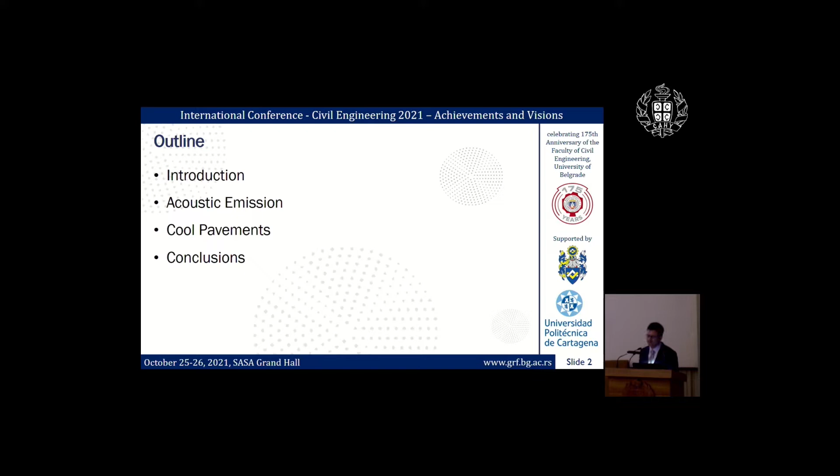But apart from these applications that are very specific, I would like to highlight that the use of applied physics in different fields requires collaboration from the scholars of that field. For example, I'm conducting research in soils now with some colleagues from the Faculty of Civil Engineering in Cartagena, and I need them because I don't know anything about that. So to apply this acoustic emission technique, it's necessary to collaborate, and they don't know anything about acoustic emission and only a little about physics.

So working together it is possible to get much more outstanding results and work on very novel problems that cannot be solved by only some kind of scholars alone.

Well, first of all, I'm going to speak about the acoustic emission technique. I don't know if you are aware of it because it's not very well known. It is a technique that is based on the measurement of the release of strain energy inside a material. But the name can be a little misleading because we are not measuring in the acoustic range. We are in the ultrasound one. So we measure waves between 20 kilohertz and 2 megahertz.

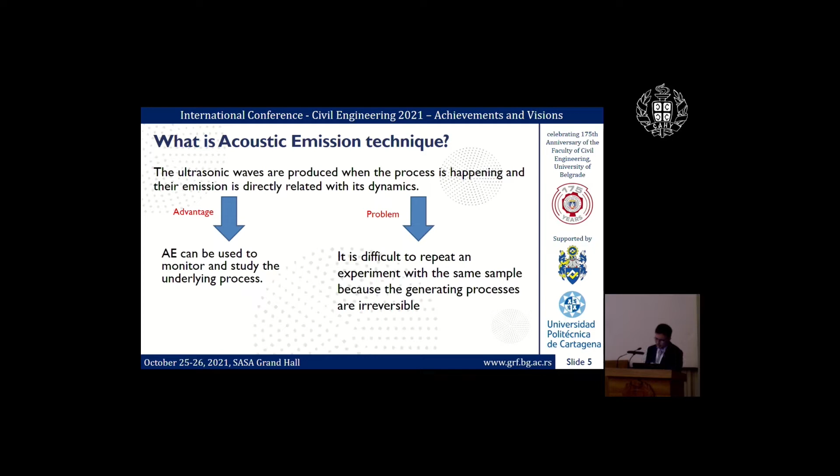Its techniques can be used in many different things, but it has some property that it can monitor a structure during a long period of time. So it can be very useful to use it as a health monitoring method, structural health monitoring, that can control what is happening, how is the health of the structure during a long period of time. So if you have a critical structure like a bridge, then you can get it controlled.

I have said something before that is not very true. That is, the ultrasonic waves that we are measuring here are spontaneous, they appear alone. That's not true. You need an external stimulus over your sample, over your structure, to measure something, because you have to induce the internal process. It can be, for example, to apply a stress or a thermal stress or something like that.

But when you are carrying out structural health monitoring, usually the external stimulus is the ambient condition. The ambient condition degrades your structure, makes it corrode, or produces a crack there, and then you can measure the ultrasonic wave, the acoustic emission that is being produced there.

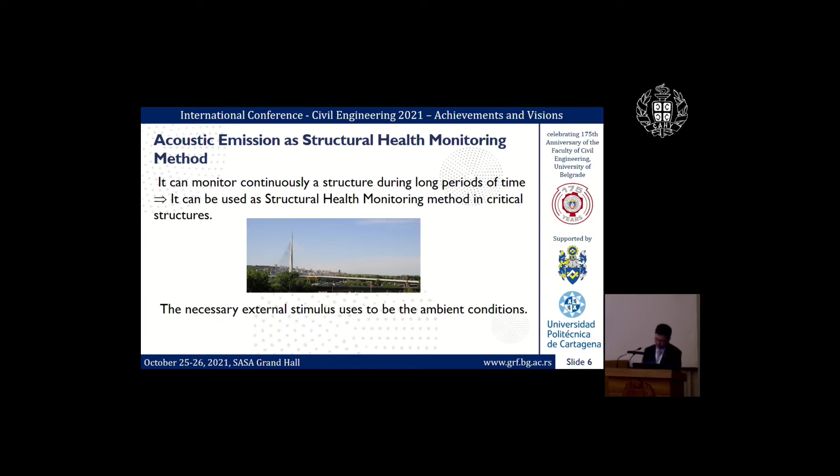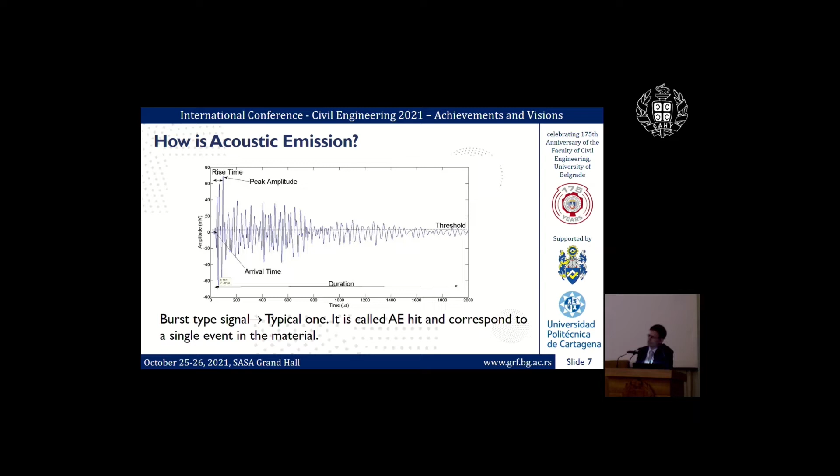Here we can see the typical parameters that we have to consider when working with the acoustic emission technique. That is the arrival time, which can be useful for localization, and it's the time when the wave arrives to the sensor, the duration of it, the rise time, the time to get to the peak amplitude, to the maximum one, and of course the amplitude of the hit, which gives us an idea of how strong this emission has been.

But acoustic emission has a problem. That is, it has a very low amplitude. It is necessary to measure very, very little displacement. So in the end, we need sensors to be very sensitive. So this makes us record many things that we don't want to measure.

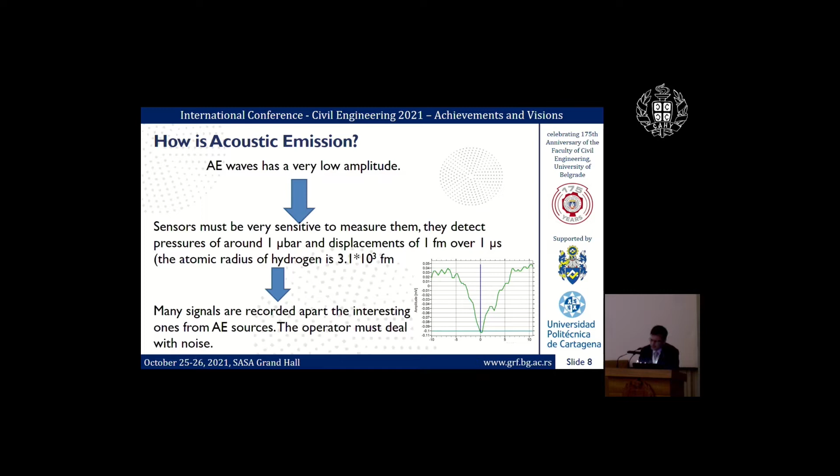Well, now that you have a little idea of this technique, how can you use it in civil engineering? You can use it in two ways. First, the most obvious one is to monitor internal processes. For example, if you are developing new concrete materials, then you can try to monitor or inspect what is happening inside your sample. Or maybe if you are carrying out a soil test, you can try to identify the mechanisms that are happening inside it.

But the most used part of acoustic emission is to monitor the health of the structure. So I'm going to show you some examples of application in health monitoring of structures. The first one will be to study plastic deformation, after that cracking, and a little bit on corrosion, but in reinforced concrete structures.

When we have to deal with plastic deformation, we have to take into account what is called the Kaiser Effect. What is it? Well, it is about the lack of acoustic emission when a load is applied until its previous stress level is exceeded. What does it mean? That if we apply a load up to, I don't know, 10 kilopascals, then you decrease your pressure, your stress, your load, then if you want to have acoustic emission again, you have to raise this level. You have to go to 20 or to 13.

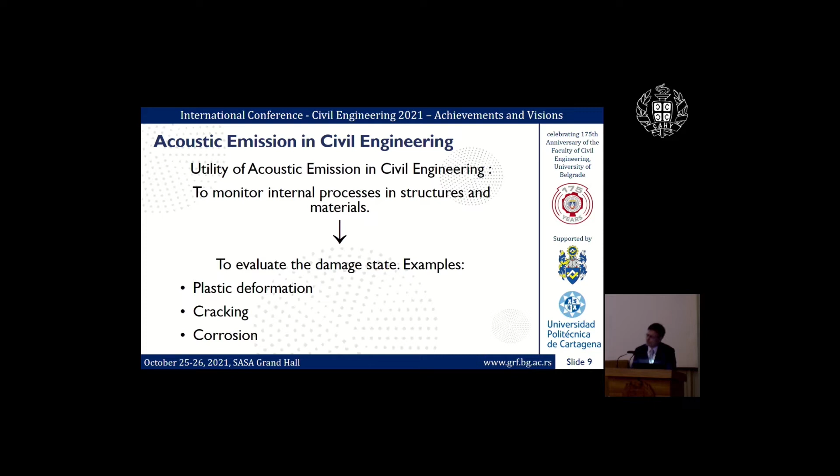Why is this happening? Well, it is because the acoustic emission is supposed to be produced only by the plastic deformation of a material. The elastic one is supposed not to produce anything. So when you apply a load to the material, to the structure, it's going to suffer elastic deformation and plastic deformation, and when you reduce the load, the plastic deformation obviously remains there, it's not going to change. And when you apply the same load again, no more plastic deformation is being carried out. So you are not getting any acoustic emission unless you produce more plastic deformation.

Well, how can it be used to inspect a structure? Well, what you have to do is to inspect your structure regularly between several periods of time. If there is no added damage in that period of time, then we are not going to measure any acoustic emission.

But if you receive acoustic emission, what does it mean? It means that some kind of damage has occurred during that period of time, and there is some discontinuity in the structure, in the mesh and the material, and there the concentration of stress is going to produce an acoustic emission that you are going to measure with your sensor. This is what is called the Kaiser effect corollary, that is, acoustic emission testing reveals damage during the preceding period.

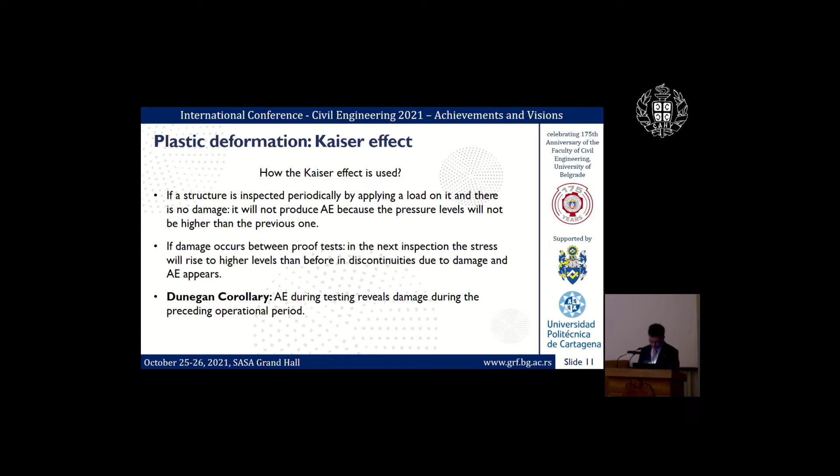Another use of the Kaiser effect is when it is violated, when it is not confirmed: when acoustic emission is emitted with an applied load that is below the previous maximum one. What does it mean? Well, as the Kaiser effect is considered universal, if it is violated, it means that serious damage is present in the structure. If you have a global emission from the whole structure, it means that a lot of damage is there, and you have to be very careful about what is going to happen with it.

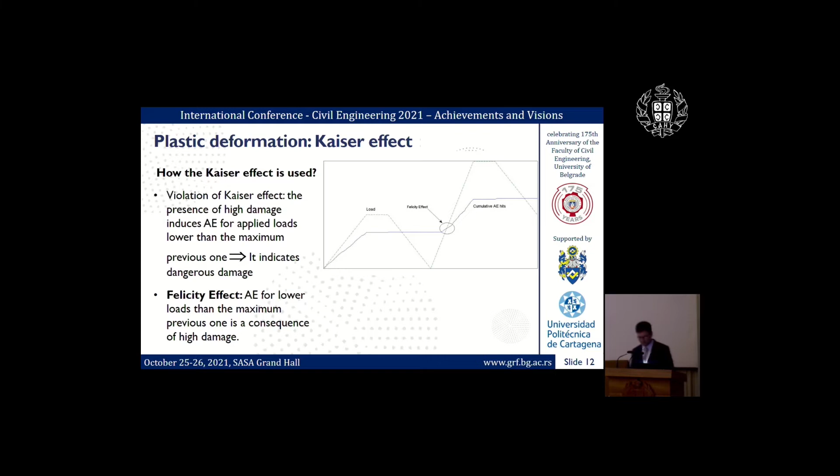It is called the Felicity effect, that is, acoustic emission for lower loads than the maximum previous one is a consequence of the presence of high damage. This effect is used to try to quantify the damage of your structure by using what is called the Felicity ratio, the ratio between the load at the first appearance in your current loading cycle and the maximum load in your loading history, the maximum previous one.

And obviously any value of the Felicity ratio less than 1 is always an indication that there is degradation in your structure, which increases with the difference of the Felicity ratio from 1. The lower it is, the more damage or degradation you have in your specimen.

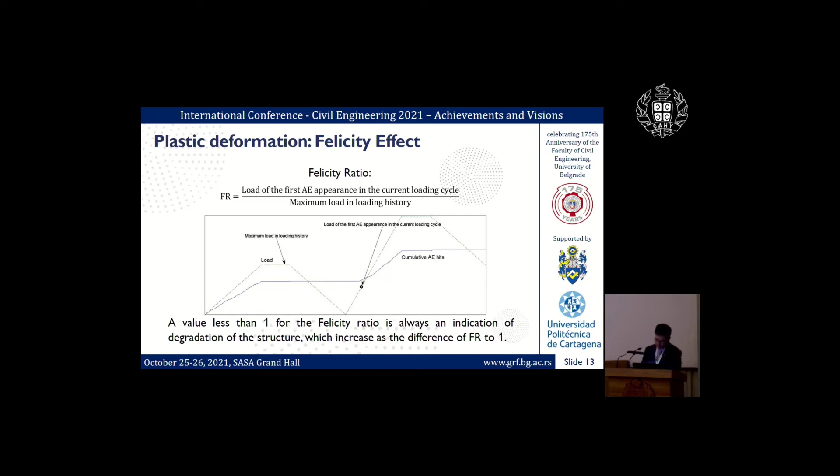Another similar damage parameter is the calm ratio. It is defined as the cumulative acoustic emission activity during the unloading part of your cycle compared with the total acoustic emission activity during the whole cycle. In this case, if this parameter is higher, it means that more damage is present in your structure. And both parameters, Felicity and calm ratio, can be combined to make a chart where, depending on the combination of the values, we can classify the health of our structure.

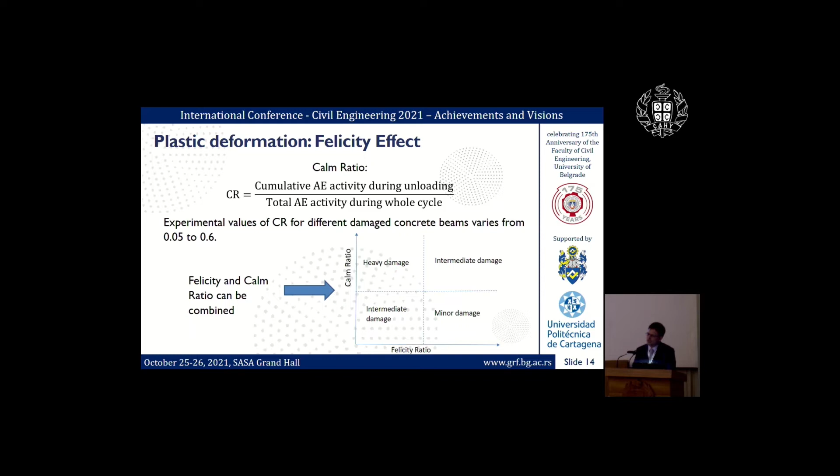Another interesting application of acoustic emission is the monitoring of cracking processes. It can be useful to localize them and to know how they are growing, to find the type of crack that is happening, its size, and the general damage state due to this cracking.

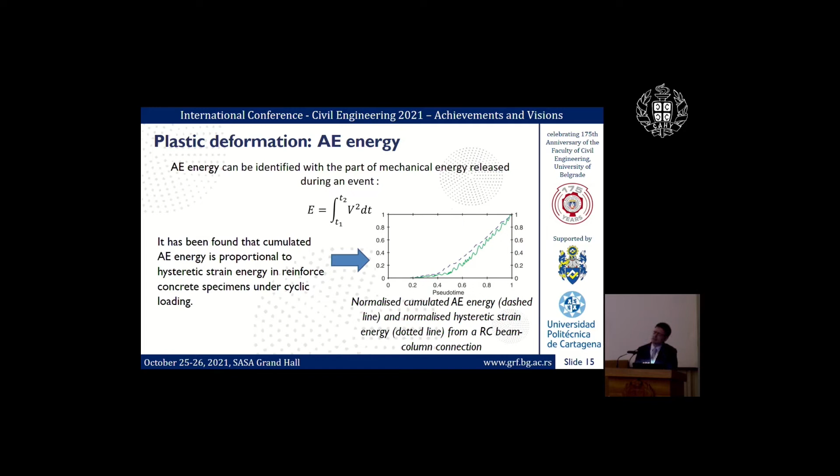The first thing we want to do is localize where the cracks are happening. Well, it is based on the arrival time of the acoustic emission at each sensor. So you need at least 2 sensors to make a one-dimensional localization, because in the end you are basing your localization on the difference of the arrival times. So when you want to make a localization, you need at least 1 sensor more than the dimension of the localization you want to carry out. So if you want a 3-dimensional localization, you need more sensors, and to avoid some localization errors, it is better to have at least 6.

What are the main problems with localization? Well, there are 2 physical aspects of wave propagation that we must take into account, and they make localization difficult. The first one is signal attenuation. Any wave that is propagating is going to be attenuated by the material. And the other one is dispersion, the difference in the velocity of the wave depending on the frequency component. So your waveform is going to change. So maybe you are measuring an arrival time that is not exactly the real one that corresponds to the position of the event.

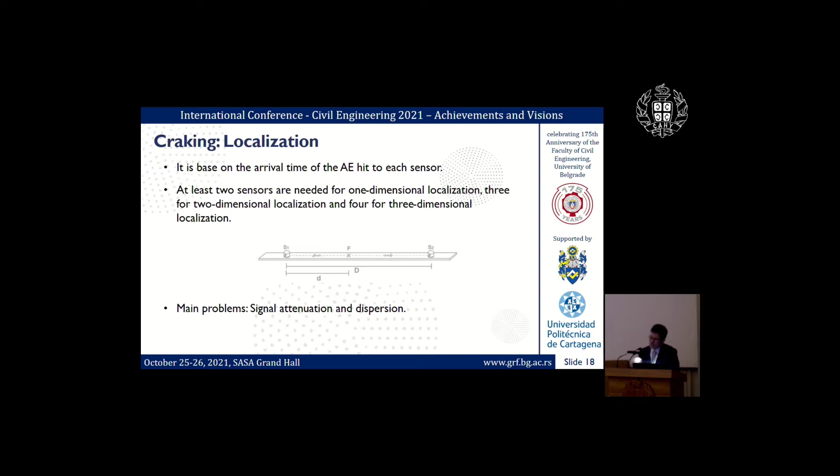A very interesting feature of acoustic emission is that it can be used to know what kind of crack is happening in your specimen. How can you do it? Well, there are two kinds of analysis that you can do.

The first one is moment tensor analysis, which is based on the first arrival time and the first motion amplitude. Knowing if the value of the voltage is up or down, and combining it with the information from other sensors, you can know if this is a tensile crack or a shear one.

But it needs at least 6 sensors to carry out this analysis, and sometimes it's not possible, maybe because the wave is not arriving to all your sensors, or maybe because you don't have money to have so many sensors. Then you can use another kind of analysis called parameter analysis, based on 2 parameters that are defined that way.

The rise time divided by the peak amplitude, and the average frequency, which is the counts that you have in your hit, the number of crossings over the threshold, divided by the duration of your hit. It's a way to measure the frequency, not very academic, but it can give you an idea of the frequency of your wave, and it is used to classify your crack.

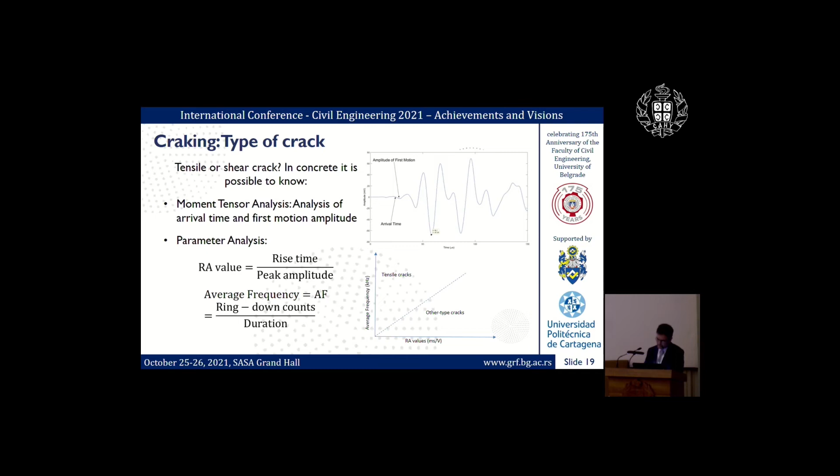Another interesting thing is to know the size of your cracks. To do it, acoustic emission scholars use techniques that came from seismology. That is because acoustic emission and earthquakes are very similar physical processes, because in both of them there is a release of elastic energy that is happening without any human intervention.

There is a big difference of scale, obviously. In acoustic emission we have very low amplitude and very high frequency, and with earthquakes we have very high amplitude but very low frequency. But the methods in seismology can be translated to acoustic emission and used to monitor the size of the fractures. Here we have an example.

It is the b-value method, which is based on the fact that the number of events with a given amplitude has an exponential decay. So if we take logarithms of the number of events and the amplitude, we get a linear relationship. The slope of the relationship is the parameter b, which is used to characterize the cracks. It is used in seismology to characterize big fractures, and here to characterize small ones.

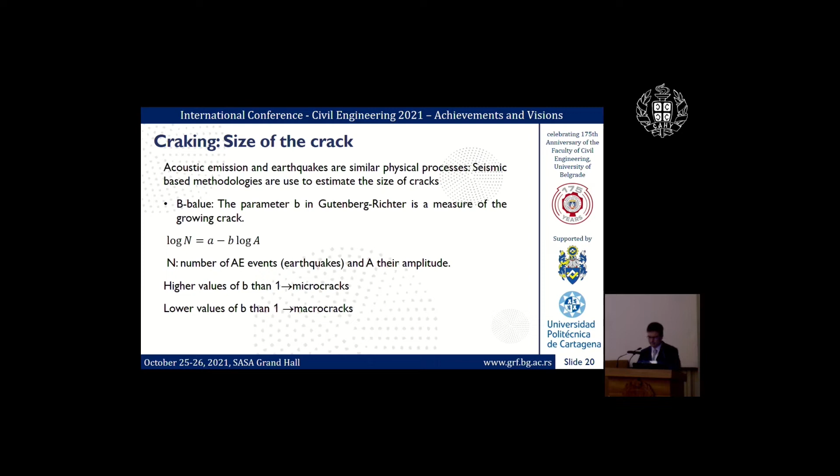An interesting thing about cracking phenomena is that it presents a multi-scale aspect, so it can be studied using fractal methodology. It has been found that energy dissipation during microcrack propagation occurs in a fractal domain between a surface and a volume. So the total dissipated energy during cracking is proportional to the fractal energy density, a parameter independent of size that only depends on the material, and to the volume of your specimen raised to the fractal dimension divided by 3.

This fractal dimension, as it is happening at a scale between a surface and a volume, has a value between 2 and 3, and it has been found that it is usually double the parameter b that we have seen in the last slide. And as the dissipated energy follows this relationship, the acoustic emission energy you are measuring, being proportional to the dissipated one, follows a similar relationship, with what is now called acoustic emission fractal density. And the important thing is how to relate it.

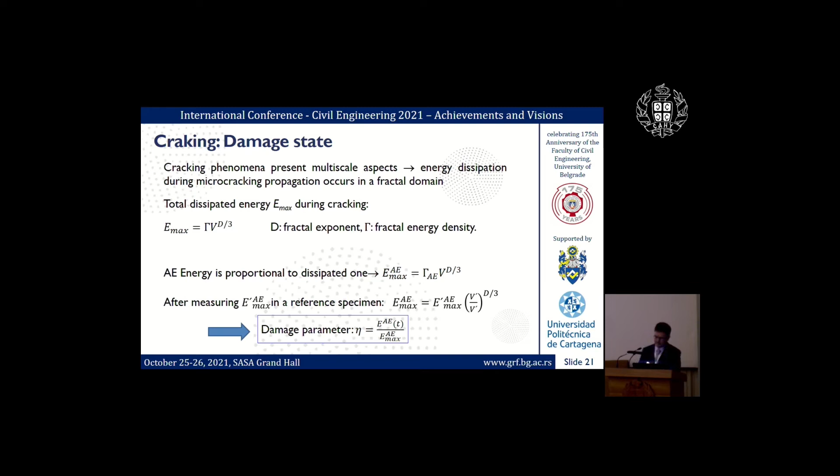Another thing that is very related with cracking is corrosion in reinforced concrete structures, because the steel inside is going to increase its size by the corrosion, and it is going to induce some cracking processes around it that can be detected by the acoustic emission. Here we have a phenomenological model of how the corrosion loss is in steel, where we have 4 phases, depending on how it is related with the corrosion properties in each part. And it has been found that using a parameter from acoustic emission, the signal strength, the cumulative signal strength follows a similar pattern, which indicates that this technique can be used to monitor the corrosion in this kind of structure.

Using it, you can know which phase your specimen is in, and then you can try to use other parameters like the average frequency that we have seen before to try to identify which phase you are in now.

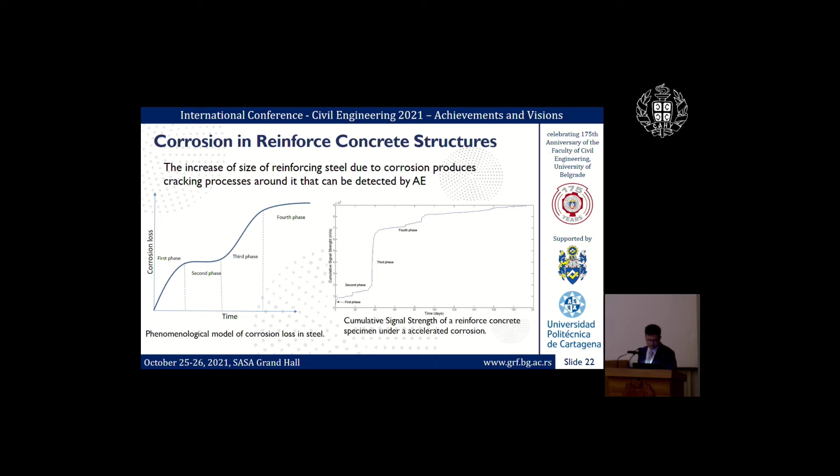Another different application of acoustic emission is crack detection in rail tracks, when you have steel. It is considered that acoustic emission is possibly one of the only non-destructive methods that can be used to monitor online fracture creation in in-service rail tracks, because you can put your sensor and try to monitor what is going on there during the pass of a train. It has been found that fatigue cracks can be detected by the increase of acoustic emission hits and the count rate under traffic loading, and by the variance in other parameters like energy, rise time, average frequency, that can also be indicators of the presence of cracks.

As you can imagine, the main problem here is the presence of noise. If a train is passing through a rail, obviously it's going to induce some noise that is not because of the crack, it's only by its movement. So you need to filter the acoustic emission you are measuring. You need to use advanced denoising technologies like discrete wavelet transform, things like that, to keep only the part of the signal that is related with the crack growing. Or maybe you can use another kind of filtering, defining what kind of hits are produced by the traffic, and then try to filter them, knowing their characteristics, amplitude, duration, rise time, or a combination of these parameters.

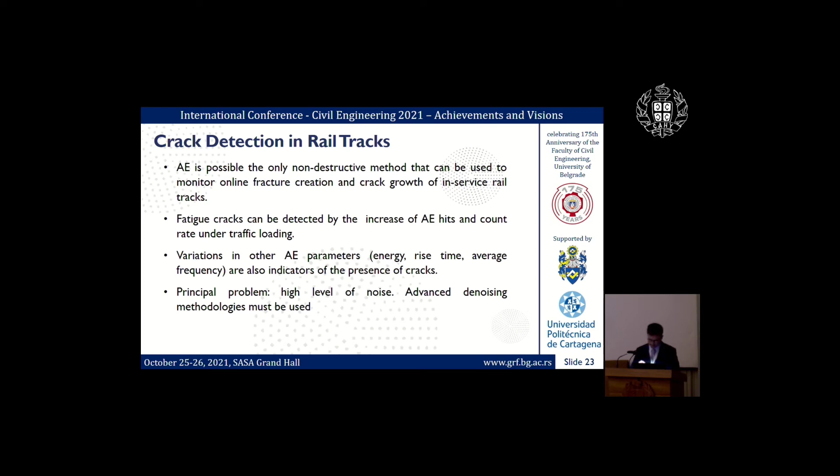Another application, this in pavements, is to monitor the thermal cracks that can be produced there due to the thermal cycles of high variation of temperature. To monitor this, the concept of embrittlement temperature has been developed, which is the temperature corresponding to the high energy event above an energy threshold. So you are measuring the acoustic emission energy events and correlating them with the temperature. When you have the highest one, then you have this temperature that can be an estimation of at which temperature the cracking process is going to start.

If you have a periodical test with different cycles of temperature, it has been found that the Kaiser Effect that we have seen before is happening here too. So if the difference of temperatures doesn't change, you are not going to get any acoustic emission. But if the temperatures rise or the difference of temperatures rises, then the acoustic emission will be measured.

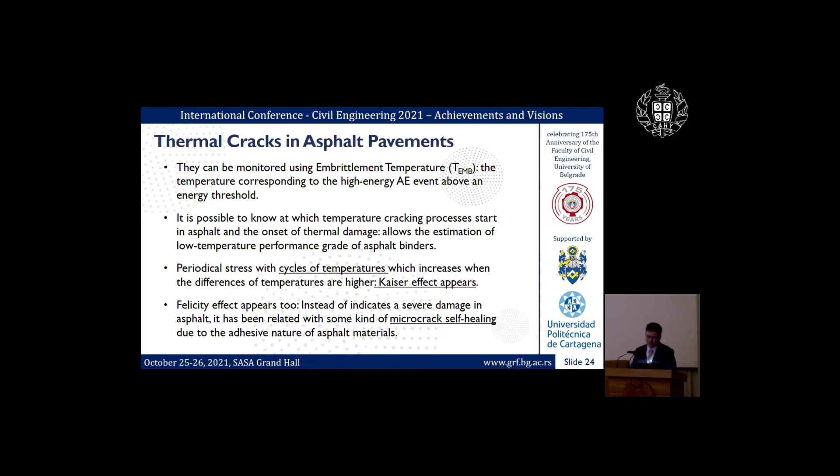Well, with that last slide, I've finished this little overview of acoustic emission in civil engineering. As I have said before, there are many other applications of acoustic emission in civil engineering, but I only focus on the one more related to health monitoring.

This new interrelationship between applied physics and civil engineering is what is called cool pavements. That is some kind of measure to try to avoid this urban heat island effect. What is happening in this urban heat island effect? Well, it is mainly due to the absorption of heat from the sun by the construction materials that we use in our cities. Concrete, metal, all these things absorb much heat, more than trees or soil.

Also, the water doesn't go into the soil, so there is less evaporation. So it contributes to the presence of more heat in the city. There are the tall buildings, which are obstacles to wind, and the emitted radiation heat from each building can go to another building. There are also heat sources like cars and machines that produce heat. So there are many causes for this effect.

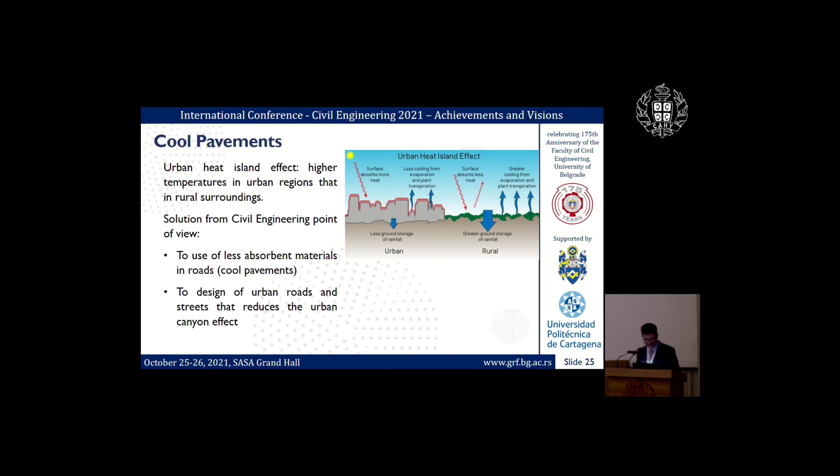Well, if we focus on the first solution, using cool pavements, how can we make pavements cool? How can they be not so hot? Well, the first thing is to make them more reflective, so they absorb less heat. How can we make them more reflective? By adding metallic oxide pigments in the mixture, so that you get a whiter asphalt that is more reflective. And it has interesting consequences: it increases urban visibility at night, so you will need fewer urban lights at night in your cities.

Another option is to make them more permeable, so the stormwater can soak into the soil and pavement, and then the posterior evaporation of water can cool them. This is done by making them more porous, and it has an unexpected consequence that is very beneficial: there is a reduction of traffic noise due to the fact that the pavement has more holes in it.

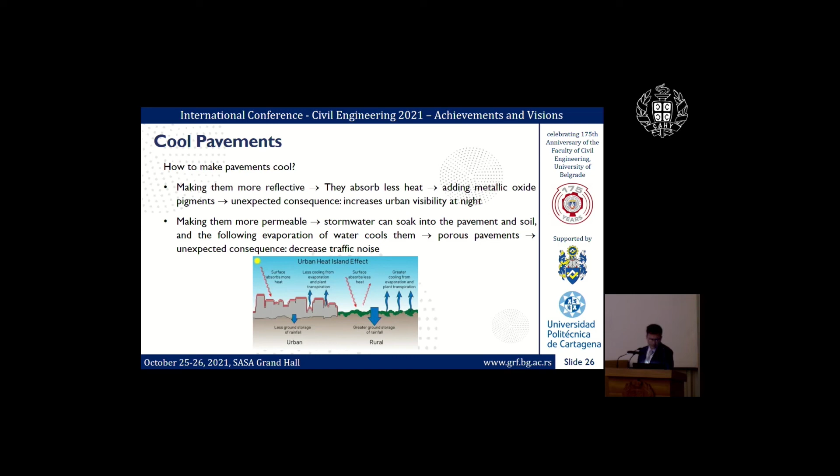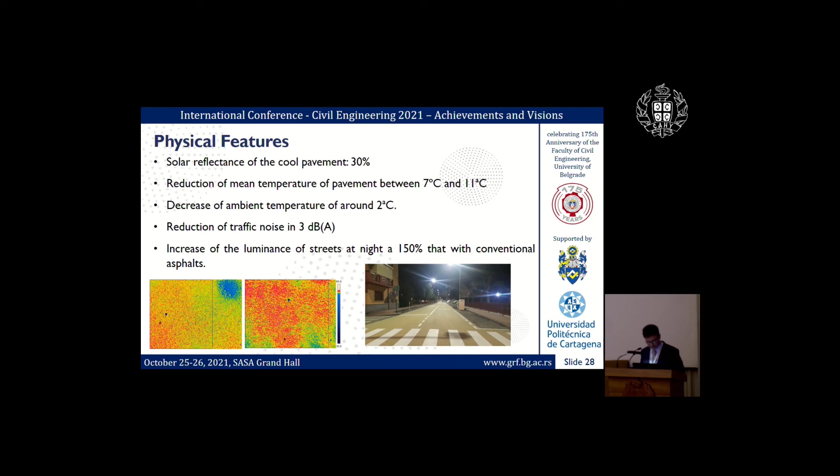Okay, I have told you the good things. It reflects more, we are less hot, we have less noise, but it has a cost. The use of these pigments in the asphalt makes the material cost about 3 times higher than a normal one. So it is something that cannot be done without a previous study. In order to let the city rulers know how this new pavement will influence their city, a simulation software of the temperature distribution in the air has been developed by my

research group. Enrique, please, we are running out of time, so just a little bit. Okay, yeah, okay, the last one, almost the last one.

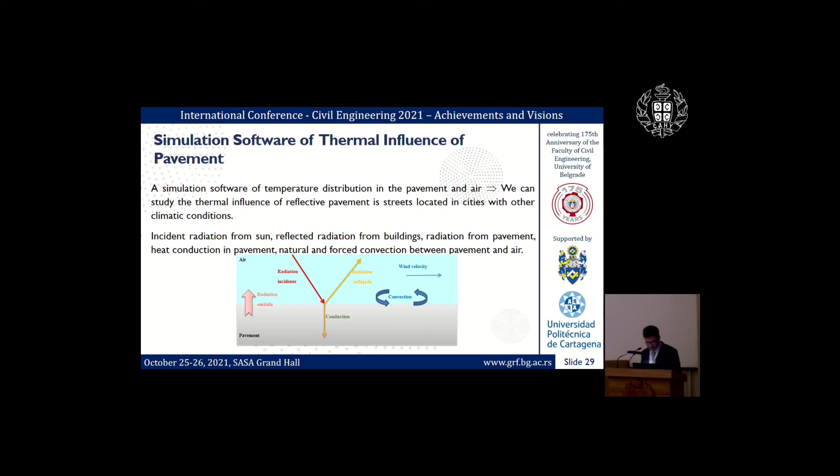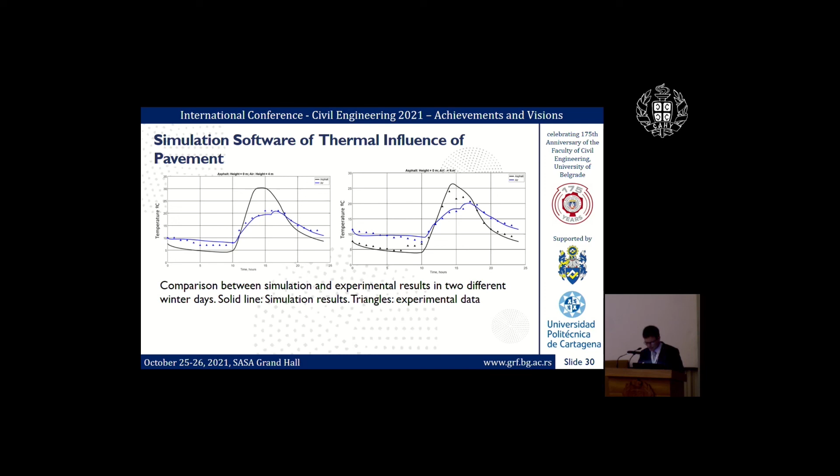Many processes have been introduced in this simulation software: incident radiation from the sun, reflected from buildings. And here we have a comparison of the results from our simulation software with the experimental measurements. Most of the time there is only a difference of 1 degree. In some places there are higher differences, which we think are due to individual events not taken into account in our model, like the passing of a cloud or the presence of a heat source near the metering station.

That was my brief overview about, first, acoustic emission, and the last one showing you this cool pavement. I would like to focus, more than on the particular application, on the fact that they are examples of interrelationship between applied physics and civil engineering, in a way that I hope is interesting for you and can inspire you for new things or new ways of collaboration between both these disciplines. I think they are very good examples of interdisciplinary application that get better results when scholars from different fields work together.

In acoustic emission, there are many kinds of engineers working together: mechanical, signal processing experts, physicists, civil engineers. And in cool pavements, the collaboration of civil engineers, people who know about heat transmission processes, or material experts is necessary. So I would like to underline that, in my opinion, collaboration especially between different fields is very good, and we will try to work in that way.